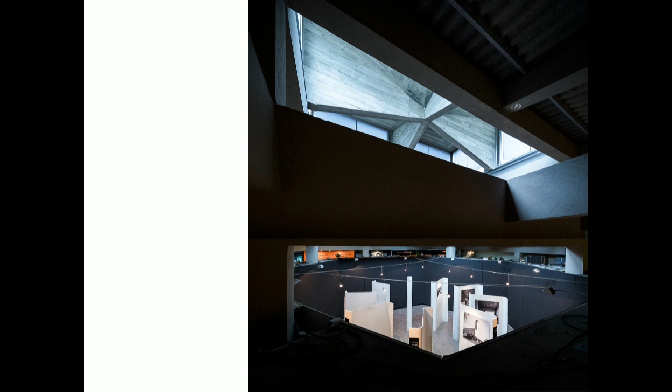Well, this is the place where it was done, and it's quite an interesting place, as you can see here, because it's next to a concrete museum, Museum Rezola. Rezola is a concrete manufacturer, and this is the place and this is the space.

As you can see, it's so small that I think it's not necessary to work a lot. I decided that I was going to choose just a few photos in white and black on the work that I'm going to show, and this is the panel.

Now it's going to Bilbao because it's moving, and all these panels can go just in a space like this, in a small van. And one of these panels can be moved by 2 people. It's quite not easy just to put that together, but it's also easy to move.

But I have to say that this is an experiment, and it has not been the first. We have to do three.

And in the beginning it was in another place, but I suppose that when you are doing something for the first time, you have to learn that you are going to have mistakes. You have to learn from the problems you have, because I wanted to achieve the maximum, and then I failed twice, and the third is there.

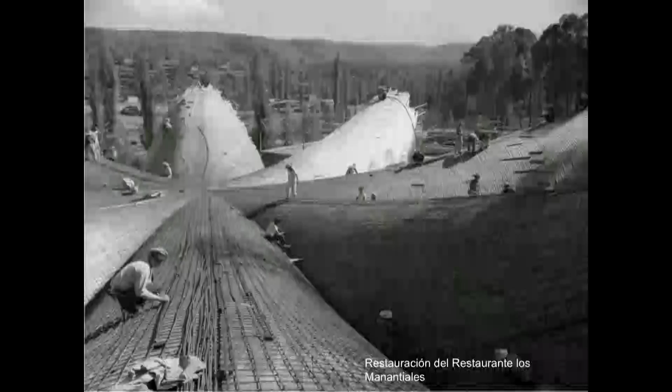Well, this is my first work. I was 24 years old when I did this restoration. This is when I finished. This is the photo when finished, and this is when we were working there. This is a work of the

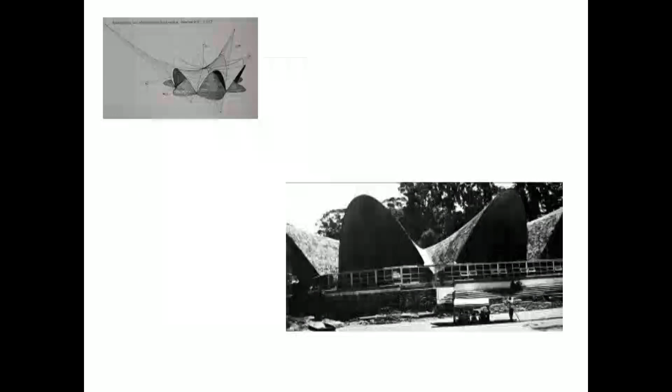'57, quite old, and I found it in the books when I was studying, and I came here to visit, and I found it like this, impossible to find, because somebody said, "Oh, this is Candela," and it was what I found. I had to do the demolition of all this big building and build the new one, to arrive at this.

I thought, okay, if I have done this work at 24 years old, I'm finished. I have done my best work in the beginning, what am I going to do now? But after that, I went back to Spain, and I followed with concrete. Also with this same idea of Félix Candela, of trying to do complex problems as simple as possible.

You know, I like this idea: simple minds make things as complex as possible, and complex minds can do things as simple as possible. And I decided to choose the second way of working. Well, it was for somebody who was working with me, for the husband of this person working for me. And it was necessary to do something as cheap as possible. This was for graphic arts, for printing, and all these things.

And the cheapest thing to do that was with these prefabricated concrete panels. And we decided to do it in the easiest way, just with 2 panels. And I decided that it was necessary to have natural lighting. All my life I have worked very much on light. As you can see there, this book of lighting architecture. For 20 years, my office has been a laboratory on light.

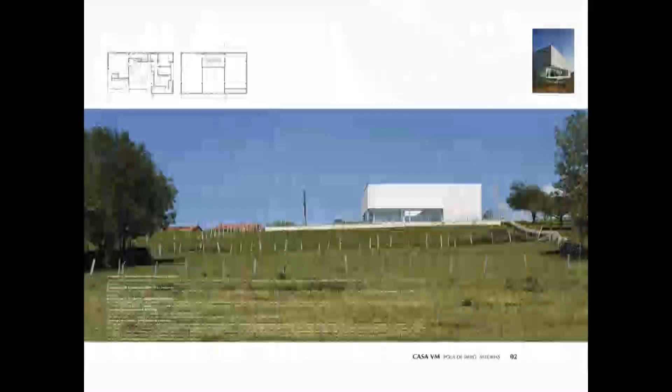After that experience, which was the cheapest way of building in Spain at that moment, my own brother asked me to build his family house. And then it was necessary to do it very cheap, and next to this place there was another place manufacturing concrete panels. And this is the house of my brother. He wanted a very big and cheap house. And I have to say that he's very happy.

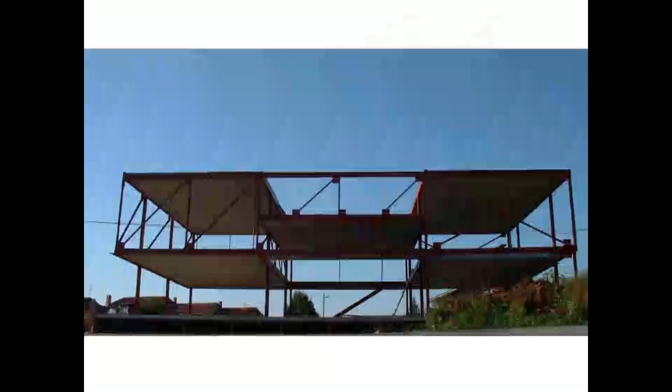And I thought that was really an invention, because he was very far from me, because Oviedo is in the north and I was living in the south. I decided, okay, this is going to be prefabricated, and I will do everything with just one panel, the same panel for the slab and also for the cladding. Okay, and it was not so easy. I had to learn a lot, but I suppose that we have to invent things.

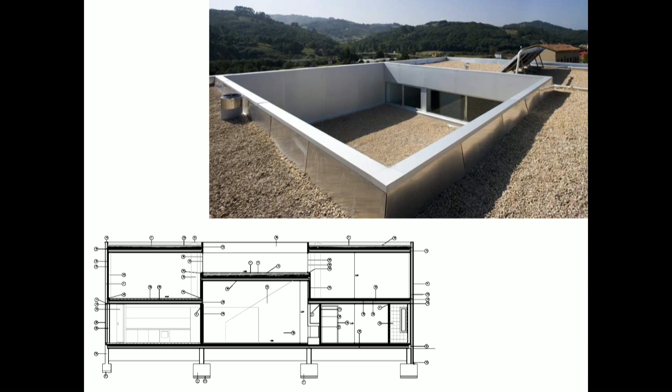Talking about invention, Javier knows a lot about that, and to decide how to do things and how to work without material, without doing anything special, with just 2 sides of the same panel, building all that with just 2 things. I want the big one and the small one, and just with these 2, it is going to avoid any kind of windows, anything. Just the big one and the small one, and that is going to be something simple, because also it was a nice place, and also because of the south.

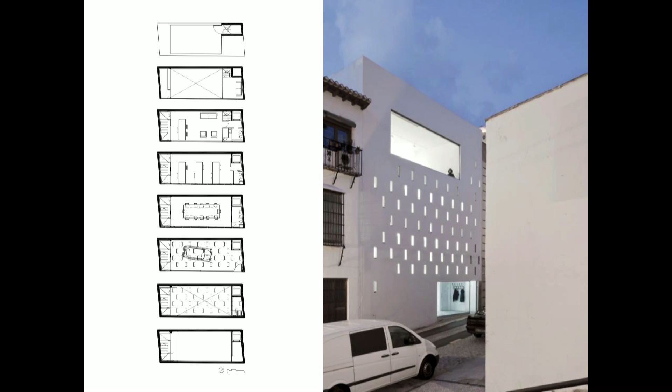It's very small. It's very narrow, not small, it's very, very narrow. I suppose that's the reason I could buy it, because it was so narrow that nobody was able to do a normal house. And okay, I don't need a normal thing, I can do something different. And I did my own office.

I have done this also, another work. In this case, the original project was not in concrete, but concrete was the solution, the best solution, because of the problems we have with the plot, because it was very bad soil, really bad. And then we have to do some kind of foundation, very expensive.

And then I have to decide to change all the structure to get the more simple and cheapest way of doing it. I'm not going to explain now how I have to change, because I want to have all this building facing the mountains, the white mountains, because it was the right orientation and the good views. And I was not going to give up because of the problem of the soil. And then I decided to change all the project when we got the results of the geotechnical studies.

It's quite simple. Also, it's just very poor concrete, and I don't ask them to do Japanese finish, but the normal one, the simple one, the cheap one, I have to say. And also, I really like it because it has something that I am very interested in, the value of invisibility. I think that sometimes you have to be seen. Sometimes I prefer not to be seen. If you don't understand me, please, okay, you correct me.

And in this case, the mountains were so amazing that I didn't want to put a building in front of them. And then I decided to be quiet. And in this case, silence was my answer to this question, to this problem.

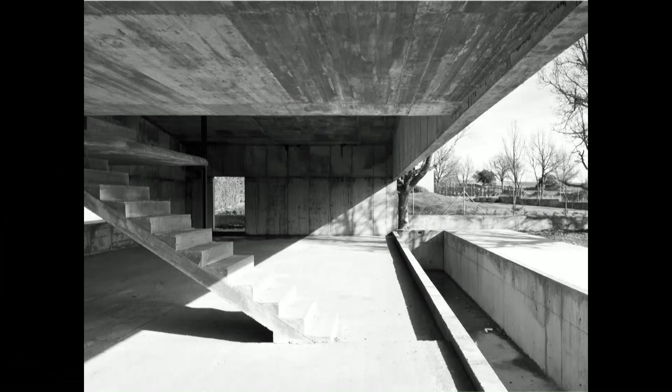This is another house. It's funny because the project, the house of my brother, was published in a Spanish design book. I don't know why. Don't tell me why this house was in a book of Spanish design. And then a person said, "Oh, I want a house like this," and she asked me to do a house like my brother's. And I did another house in concrete for her. Of course, it's not like my brother's because it was absolutely different.

But in this case, the only thing she was sure of is that she wanted a concrete house. And I decided that if we are going to use concrete, it's going to work in the most efficient way, because I cannot use a structure as ornament. Then, all this house is working as a very big beam. And I have to say that I enjoyed it a lot, because for me this is my favorite game, to work with structure and to go to the maximum and to the limits, no? To explore the possibilities of materials, the possibilities of structure.

Remember that I started with a work of Félix Candela. Then, it is something that is quite, ¿cómo se dice? Que engancha. No, it's something that moves you to do things.

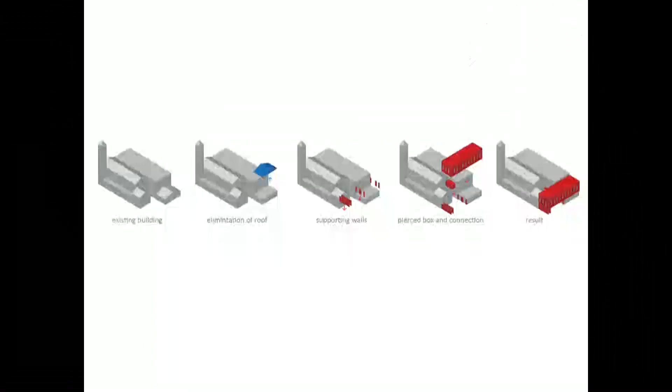And then I found this system that is a patent, trademark or patent, of an engineer of Granada, and it was concrete with polystyrene, porex, inside. And then I got it with just 83,000 euros. No, it's not what I got. It's the total price of this building of 200 square meters. And as you can see, this is me. It's quite high. This is the place. And this was the school.

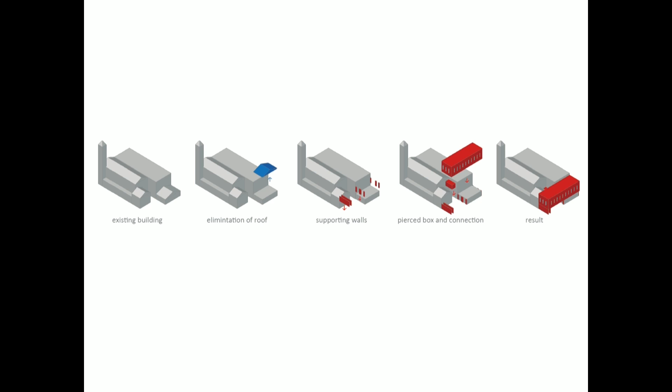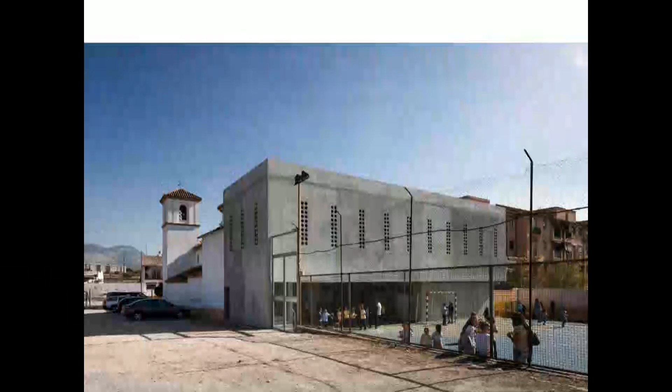I had to eliminate the roof to put in some supporting walls and just put in the box and the connection, and this is the result. Also, it was very important to get the right sun, because we had no money for heating or cooling. So we had to study it very much, and this, as you can see here, is quite ugly, but I don't mind.

And now they got some money and they painted it white, and now they think they are not so poor as they looked when they were here, but it's working very well. And if somebody says it is ugly, now in white, they don't think so. I say, okay, could you make it cheaper? Could you solve the problem better?

And I'm not so worried now about the perfection, the finish. I am more worried about light, space, working, children, other things. Maybe I am getting old or something like that, but well, this is one of the most important works I have.

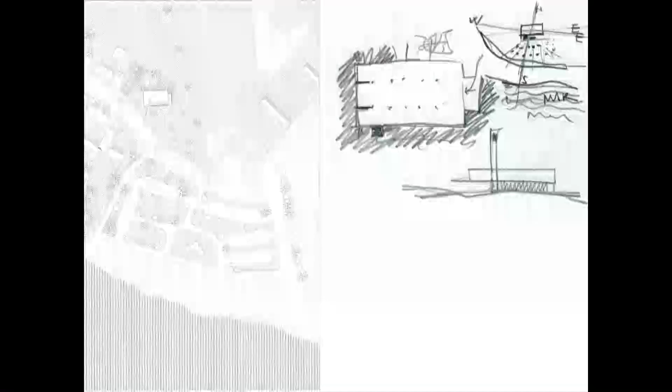I suppose that in Spain, building a church is quite a challenge. It's quite challenging, and also with the same idea: we don't have money, but we have a beautiful place. The place is here. It was in front of the sea. It was like a dream. And I decided that this was going to be a stone, and I was working with concrete, and I decided it was the cheapest way of doing what I wanted to do. Also because of the space.

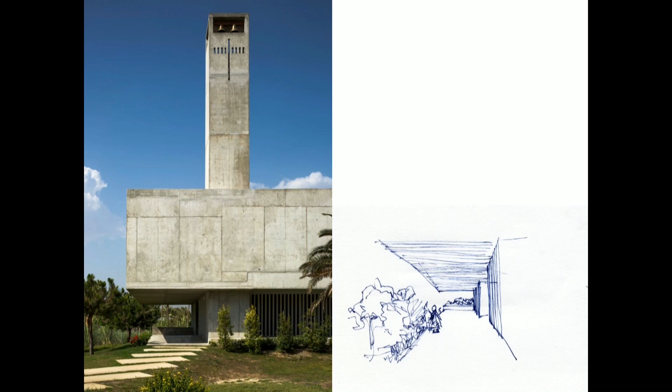As you can see, I'm not worried at all about being very perfect, because I think that this is not the point in this case. I'm worried about other things: movement, the relation, the scale, the relation between this very low ceiling and the inside.

Because I also had a very, very strict regulation, and they asked me to follow the same rules as the single housing in front of me. The maximum height was 7 meters, the same as a house of 2 stories. Do you understand more or less what I mean? I said, okay, I'm going to do a church. Then, yes, you have to use the same regulation as the single house. How is that possible? Okay, don't worry. I have to use some things to avoid this scale.

And I tried to do it very abstract. Well, the only thing they let me have was of course the tower, because the tower was like a chimney, and they didn't restrict the size. Also, there was another important thing. I had no money to put anything. Then I decided not to put anything, just eliminating concrete. And it was quite funny, because at the beginning we asked the builder to do it without extra price, just to do the holes. In the beginning they said okay, no problem, but it was quite difficult to do that.

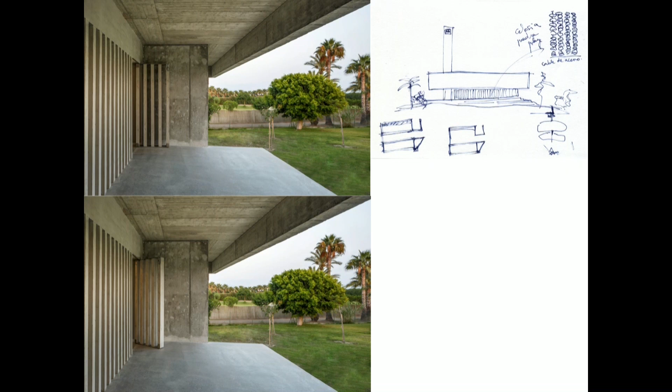I was working with a very good friend of mine, Antonio Jiménez Torrecilla, and we were working on how to do things in a different way, on this celosia, this system. And we thought, maybe we can use stones, like the stones of the beach we have there, and put them in iron. But then my client said you can come and cut it, it's not possible, and I had to change again, and I decided that I was not going to be an artist. It was not what I was interested in, and I said, okay, I will do the same again.

And I built this prefabricated piece without iron. It was reinforced with fibers because it's very near the sea. Something that is very important is how to work with this low technology, because this is quite low technology.

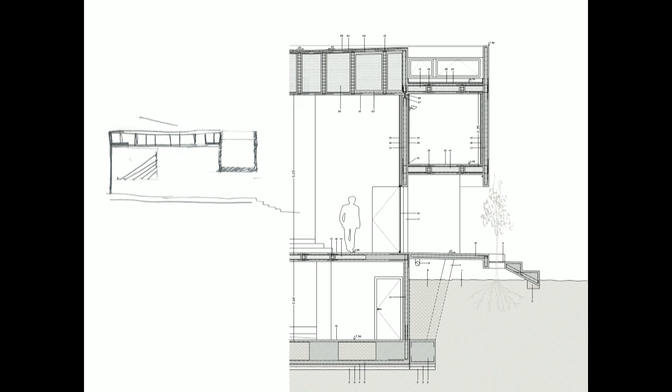How can you do things thinking in 20, 30 years, not just thinking in 3 years? And I know that nobody is going to do any kind of maintenance. Then I have to do it as easy as possible and for a long time. This is the system that I use, that is called Elesdopa, impossible to remember. You can find it on the website.

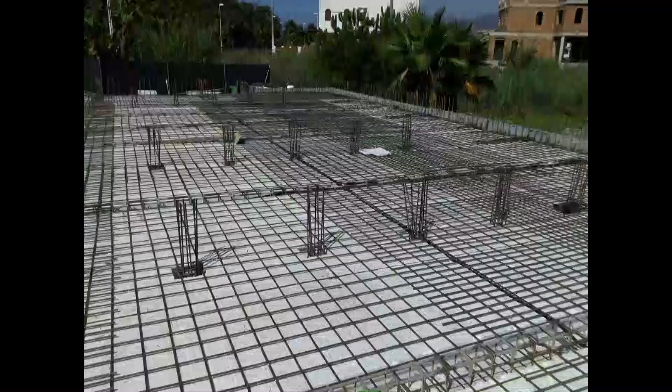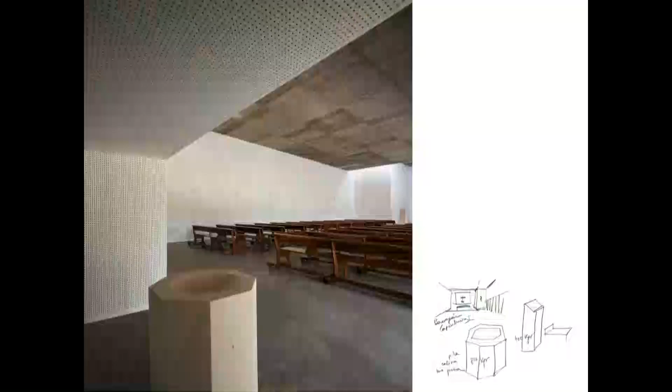And you can see here that I put the insulation between the slab down and up, and you can see there how the insulation is inside, and it helps to get a very good quality of insulation. You can see here. Well, this is because here is the head of technical studies, and I decided that coming here it was important to explain how I was doing it. And then I could get this slab without any pillar. That was quite important, 30 meters width in one side.

And also light was one of the things that I thought were important here. I was not going to do any artistic work, no money, and then I thought that it was important to get the right light, and I thought that I was going to use just 3 lights. The first is this direct light on the presbytery, where the altar is.

The second one is the light directly coming from the west, because it's oriented east-west. And on the right day it is just in the center of this altar. And the third one is this light that is coming down from the south to the people who are sitting there, for all the people.

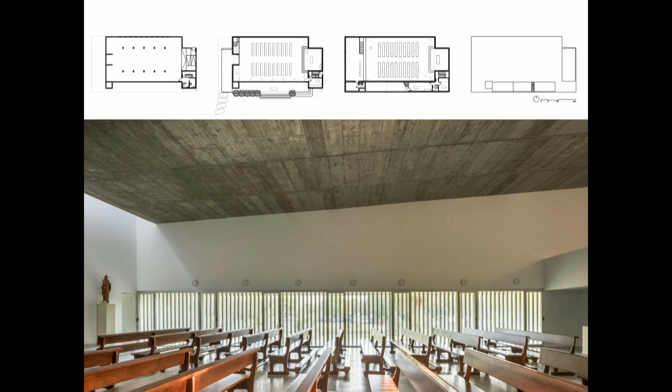These are also experiments with the same system that is using just two materials. I have to say that the price of the church has been 429,000 euros, all the church, finished. Well, maybe it's not totally finished because we have to finish something inside to improve the quality of the altar, but it's just that, and it's working well.

At the beginning, the priest was thinking that it was strange, he thought of something older or something more classical, but now he's very happy because he thinks that it's working well, and it's like a kind of stone in the middle of the garden. And I was very interested in being in this place, like being in the middle of the garden, in this relation with nature, landscape. Okay.

These are experimental housing that I did with some friends for us. It's in Granada, next to the Alhambra. In this place, this is Granada, these are the houses, and this is La Colina del Mauror, in front of the School of Architecture. Here you can see where it is...

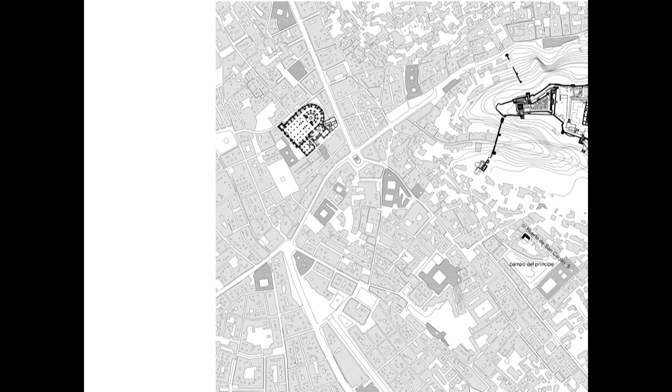Here. These are the houses, this is the Alhambra, and this is the cathedral. This is to see more or less where it is. But it's not so easy to work in Granada. Not easy at all, because we have a long history, and we have hundreds of years waiting for us. When we opened a small hole, there was a cemetery, and we were finding them, and we were working a lot with archaeologists, and all this.

We found this, that it was just a head of a Roman... It was a Roman, how do you say? Doll, a Roman doll. And well, it's interesting to see that we are not the first. And maybe we are not going to be the last. And so we have to do things for the future also.

Well, this is the house, very simple also, again, without image, as you can see, and with low tech, and all is concrete. It's just one material, and when we finished the structure, everything was done, because all the installations were inside. Here is the entrance. Also, I was worried because in Granada we don't have a lot of water, and when it rains, it was very important to get the water going to the soil.

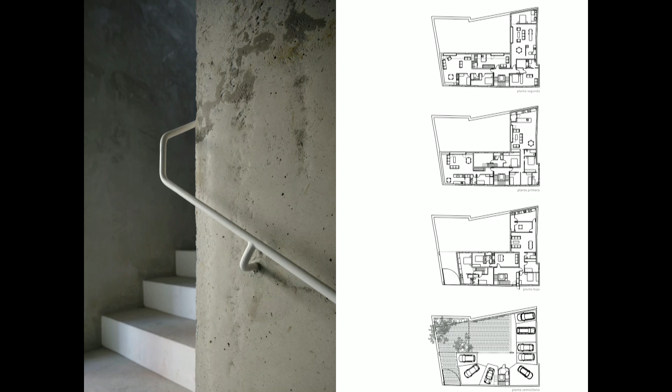Because when I did this, I had no clients, and then I had time to do this. And as you can see here, just these two materials. Well, this is for the lift and for all the, ¿cómo se dice, contadores? Well, for all these installation things. This is concrete, and this is the inside of the houses as they are now.

But I have to say that I am starting now with more things, pushing other ways of building with this responsibility, how to build with less iron, with less things, trying to find new fibers, plastic fibers, also using recycled materials, to change what is waste into new materials.